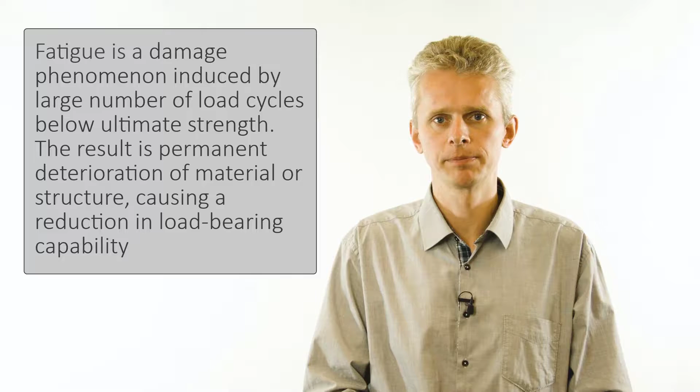Initially, fatigue has been presented using Wöhler curves, named after August Wöhler. This German engineer performed many tests and plotted the failure life against the stress amplitude. His reasoning was that the stress amplitude was most decisive for failure. This means that he observed that changing the mean stress of the cycle has less of an effect on the failure life.

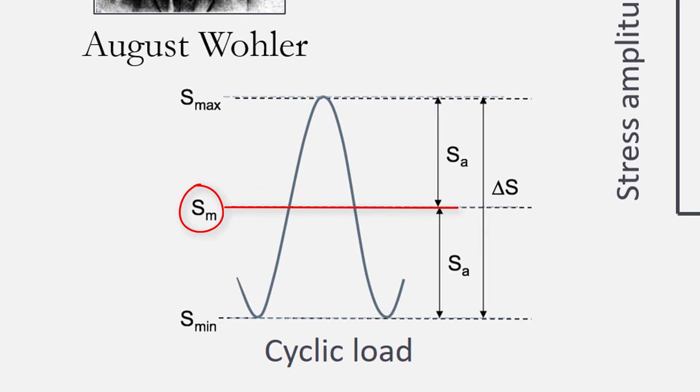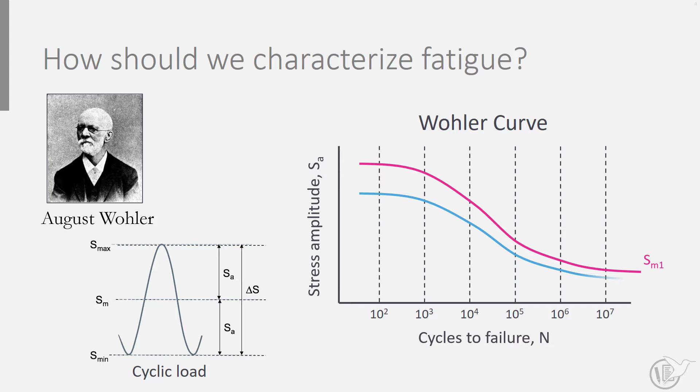Because one can think of many combinations of mean stress and stress amplitude, these Wöhler curves, or S-N curves, are generally plotted for a specific mean stress. So the curves illustrated here each relate to a certain mean stress, and they illustrate how life increases if the stress amplitude is decreased. The higher the curve, the lower the mean stress. Or, if we look at the horizontal line in this illustration, the lower the mean stress, the longer the fatigue life.

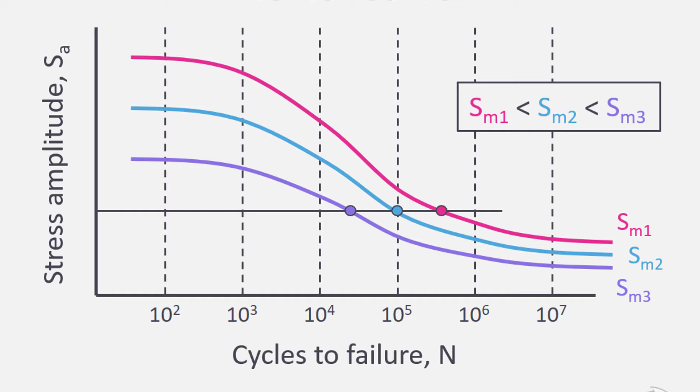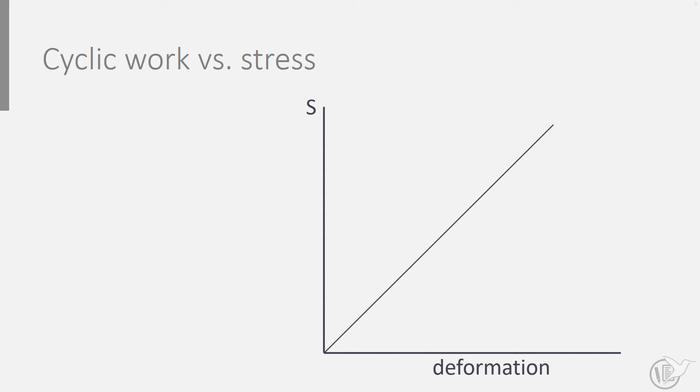The question is, can we understand this? Why would the fatigue life decrease if the mean stress is increased? One way of looking at the fatigue phenomena is through physical principles of energy. The application of cyclic loading implies that the material or structure cyclically deforms. This combination of load and deformation relates to work applied to a structure or material.

Increasing the mean stress while maintaining the stress amplitude evidently implies that more work or energy is applied to the structure. Applying more cyclic energy obviously should result in more degradation or damage, and thus a shorter life. Similarly, maintaining the mean stress while reducing the amplitude stress implies reducing the cyclic work applied and hence an increase in fatigue life.

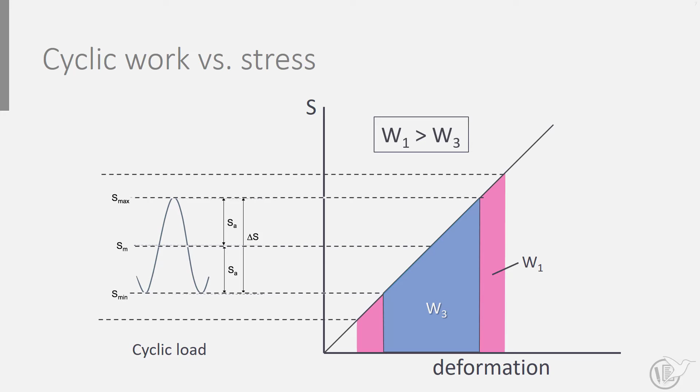The S-N curves illustrated here contain two asymptotes. The upper asymptote relates to the ultimate strength of the material. The static test effectively is then treated as a single fatigue load cycle. The lower asymptote is the fatigue limit. This means that cyclic loading below this limit does not cause any failure of structure or material.

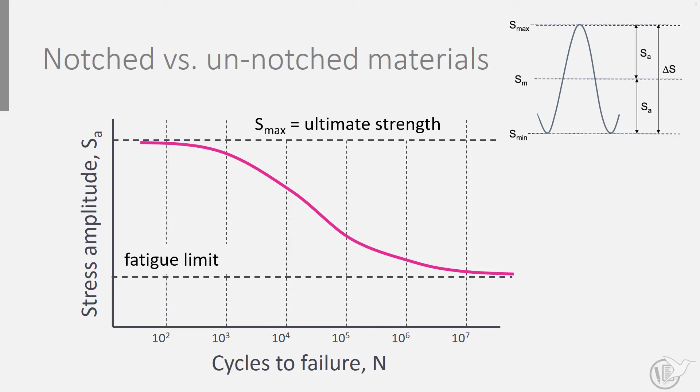In a previous video I explained that ductile materials are less sensitive to notches. Now this can be illustrated here with the two S-N curves, where the upper asymptote effectively is the same for both unnotched and notched materials. There is however an effect visible on the lower asymptote. In fatigue loading with low amplitude stresses, the entire notch vicinity remains mostly linear elastic, which means that the sensitivity to notches is observed. This is illustrated by the lower fatigue limit for notched materials.

The reduction of the fatigue limit can be calculated by taking the fatigue limit of unnotched material and dividing it by the stress concentration factor Kt. What can be concluded from this illustration is that at the same amplitude stress, a notched material has a lower fatigue life compared to an unnotched material.

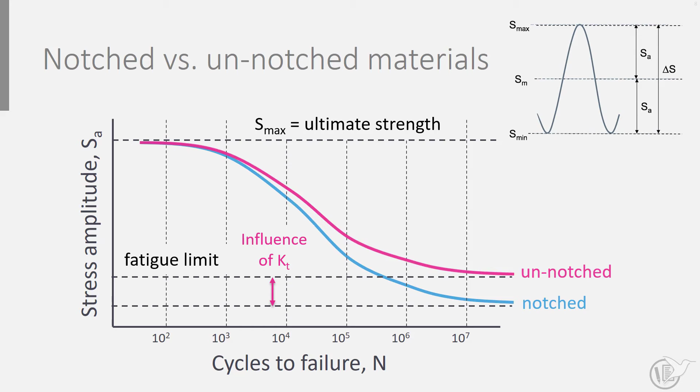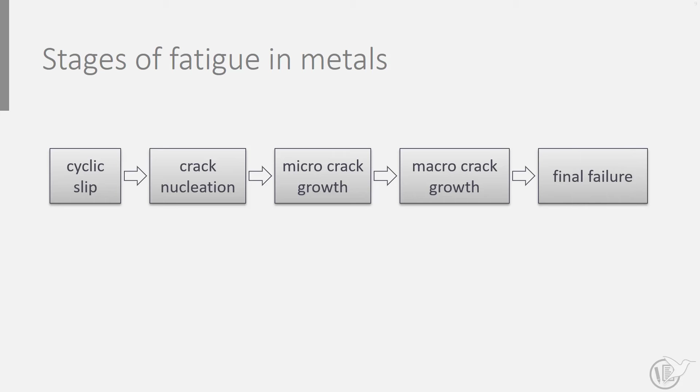Although different in detail for the various engineering materials, one in general can identify several stages in the fatigue life. Take for example metallic materials, where fatigue damage first nucleates at the microscopic level to form a micro crack. This then develops further to a crack visible at the macroscopic scale, eventually leading to failure. Traditionally, the lifetime until micro crack formation is referred to as the initiation phase, while the macroscopic crack growth is referred to as the crack growth phase.

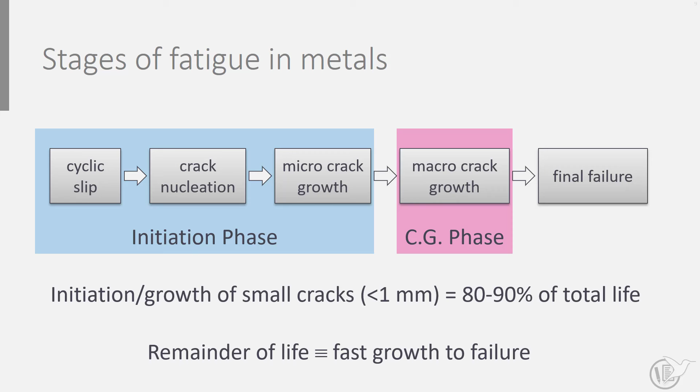In general, when fatigue testing an unnotched metallic material, the initiation phase covers most of the entire fatigue life. Once cracks can be observed, the lifetime until failure is very short. In designing against fatigue, this means first of all that one has to avoid or limit stress concentrations as much as possible. Furthermore, one should avoid any damage initiation by creating smooth, undamaged surfaces. Nucleation of fatigue cracks generally occurs at the material surface. Reducing surface roughness increases fatigue lives in general.

Another important measure against fatigue is the selection of fatigue-insensitive materials. One may give in on the ultimate strength of a material, with the benefit of having substantially larger fatigue lives. The damage-tolerant design approach may increase the operational life of a structure effectively. By scheduling inspections, detecting cracks and repairing upon detection, structural life may be extended beyond the component's fatigue life.